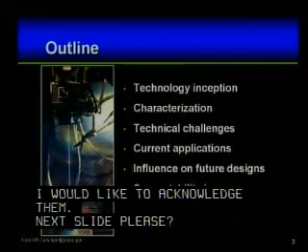Next slide, please. This is an outline for my talk today. I'll start off with the inception of the technology, and then talk a bit about characterization of the materials that are produced using the EBF3 process. I'll then proceed on to some of the technical challenges that we've come across with the process, and specifically looking at what needs to be solved in order to reach full commercialization. And then I'll switch gears a little bit and talk about applications, both current applications and some potential future applications that we're working on, both for aeronautics and for space vehicles. And then I'll end up with a little bit of the possibilities that this technology may offer for in-space support.

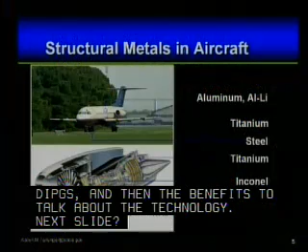Next slide, please. So starting off with the motivation, a little bit of the process description of the EBF³ process, and then the benefits to talk about the technology inception. Next slide. Okay, so in structural metals used in aircraft today, typically you see aluminum or aluminum lithium used in fuselage and in wing panels. The highly loaded areas of the aircraft, like wing tips or wing roots, and some of the hot structures in the engine use the titanium alloys. High-strength steels are used for landing gear, and Inconel can be used in the hottest sections of the engine. So there's a large amount of metals that go into today's aircraft. And even with the future aircraft moving towards composite structures, there's still a significant metallic component in aircraft structures.

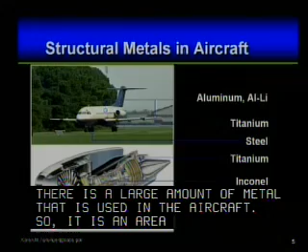And so it's an area that we wanted to look very closely at to see what is new on the horizon. We've been building airplanes out of metals for a long time. What's new on the horizon? Next slide, please. So our motivation, we were challenged back around 2001 to come up with what is new in metals. And specifically looking at efficient lightweight structures, it has to be a cost-effective process, and potential for enabling new alloys that are beyond the current conventional suite of materials that we use were three of the areas that we wanted to look at.

And what we ended up with, we didn't set out to develop a disruptive technology, but we ended up with a disruptive technology. And by disruptive, I mean that this is a technology that has the possibility of replacing a segment of the manufacturing market as it currently exists today.

Next slide. So back in 2001, when we first started looking at what's new in metals processing, layer-additive or deposition processes had been around for several years, but they were primarily using lasers, either a CO2 or a neodymium YAG laser. And the problem with lasers trying to do metals fabrication is that lasers are reflected off of shiny surfaces, and metals are inherently shiny.

In addition to the coupling efficiency between the laser and the metal to be able to melt, there are also issues with the energy efficiency. Only 5 to 10% of the energy, and this has improved over time, but in 2001, only 5 to 10% of the energy that was actually pulled from the wall ended up being used to create the beam. The rest was all waste heat.

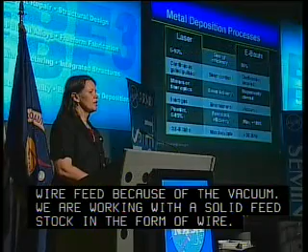And we work with a wire feed because of the vacuum. We're working with a solid feedstock in the form of wire, but 100% of that wire is captured into the part that you're building. And we've demonstrated deposition rates on the order of 30 pounds per hour. So we believe that the electron beam process has commercialization potential, and it solved many of the problems that existed with the state-of-the-art in 2001.

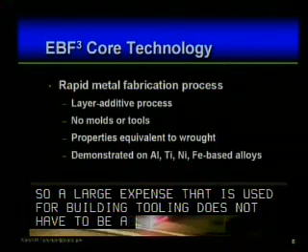Next slide, please. So the core technology for EBF³ is that it's a rapid metal fabrication process. It's layer additive. It does not require molds or tooling, and so a large expense that's used for building tooling for forgings does not have to be absorbed when you're using an EBF³ process. The properties that we've observed are equivalent to wrought properties, and I've got some charts later on to show you about that. And we've so far demonstrated this on aluminum, titanium, nickel, and iron-based alloys, which are all of the alloys of interest that I showed on the earlier slide for aircraft structures.

Next slide, please. So the EBF³ process, we start with a CAD drawing for the part that you want to build. That part is sliced, the CAD drawing is sliced and fed into the EBF³ equipment. The E-beam is then turned on to create a molten pool, and wire is fed into the molten pool, and then the part is translated on a layer-by-layer basis to build the parts up. We've been teased about building a replicator in the vernacular of Star Trek. Next slide, please.

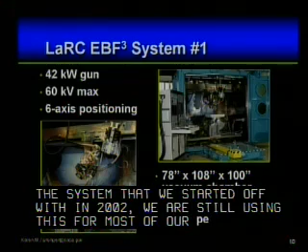The system that we started off with in 2002, we're still using this for most of our process development for our large fabrication experiments. And this system is an electron beam welder that we purchased, and we had it modified, adding a double wire feed so that we could build the layers up. It's got a high power electron beam gun. We're only using about a third of the power that is available to us, but because it was a commercial off-the-shelf system, we bought something that could suit what we needed. The vacuum chamber is a 7 by 9 by 9 foot steel chamber, and the build envelope is on the order of 2 by 4 by 5 feet inside of that vacuum chamber.

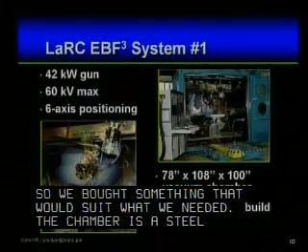Next slide, please. Several years after that, we started looking at trying to build a smaller system. The process is exactly the same, so the physics of the process is still using the electron beam to build up a part.

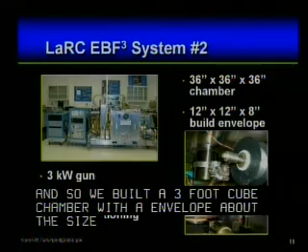But we've scaled everything back so that we could do some demonstrations for 0G. And so we built a 3-foot cube chamber with a build envelope about the size of a shoebox. And we've got a 3 kilowatt gun for safety on the aircraft and just to scale everything back. It's enough power for what we need to do.

Next slide, please. So this is, let me set up for you, next I'm going to have a video, but let me set that up for you. This is a picture looking in the chamber of our large electron beam freeform fabrication system back at Langley. If you roll the video, please. This is looking through the door, just showing some of the motions capable in the system itself.

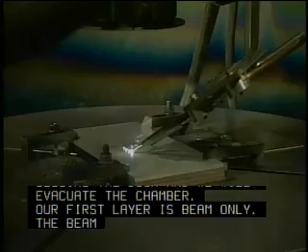Here we're closing the door, and then we'll evacuate the chamber down to about 10 to the minus 5 torr. Now our first layer is beam only, so the beam is coming down from the top center of the screen. And the first layer is just to clean off the oxides on the surface and to give us a nice warm surface to be able to adhere the deposit to. Now we're showing the subsequent layers being added on. This is all 2219 aluminum, and this is real time.

We can build faster than this, but we're using 0.063-inch diameter wire, and the only part of this that is molten is the shiny part of the molten pool in the image there. So the process solidifies rapidly. So some of the reasons, I've already talked a little bit about the EBF³ process, but the main idea is

that we can build near-net shaped parts, so you can minimize scrap, reduce the part count. It also offers efficiency in design, lighter weight designs, and enhanced performance. The unitized components, unitized I mean being able to build things in a single piece. So instead of building an assembly that needs to be riveted or bolted together, you can build components of some complexity into a single part. And that offers the opportunity to, because this is a layer-additive process, integrate different functions into the structure, or we can change the material on the fly so that you've got different alloys at different points. If you have reason to need different alloys with different properties, we can tailor the properties locally.

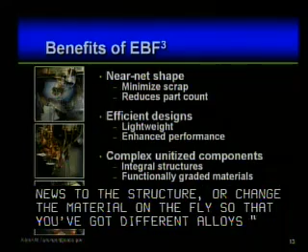And finally, it's got some green manufacturing ramifications. Again, this was something that we hadn't set out to do, but it ends up being a nice benefit in that we're minimizing the waste products and it's energy and feedstock efficient. Next slide, please. To give you an idea as to what I mean by energy efficiency.

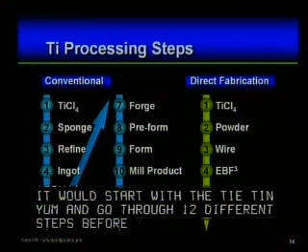Starting from titanium ore, these are all of the process steps that would be required to go from titanium ore to a final product. On the left, in blue, is the conventional processing that we would use today. So you start with the titanium ore and go through about 12 different steps before you get to the final part. There are losses in energy and in titanium itself along each one of these steps in the process, because you have to forge a billet and then you skim cut it and you press it down, skim cut it, roll it, skim cut it again. So you've got a lot of losses in the process of just going from titanium ore to a billet and then machining it out to a final product.

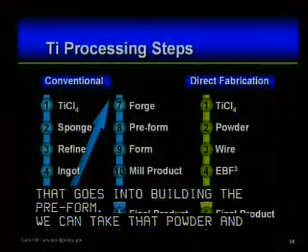DARPA has been working on a new process and has funded several organizations to look at low-cost titanium. And the low-cost titanium process basically skips steps 1 through 9 to go directly to a powder form. And so you've dropped out a lot of the work that goes into building the preform. And then what we're doing is, we can take that powder, go directly into a wire form, and then that wire becomes the feedstock for E-beam freeform fabrication. So in using this future set of processing steps, you can eliminate about half of the steps and a lot of the losses in both energy and in titanium.

Next slide, please. This shows you in a little bit more detail the kinds of savings that we're talking about. And this is the reason that industry is so excited and is really investing heavily now in trying to get this technology commercialized. Along the top line is conventional machining, and these are real numbers. This is really the way it is done today to build structures for aircraft parts. It'll start with a 3,000-pound billet of material. Machine it down to a 150-pound part. Obviously you're losing a lot of the titanium. There's a lot of energy that goes into making all of the chips.

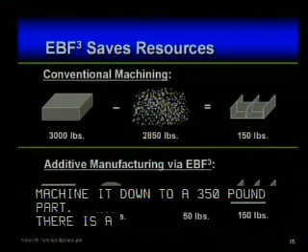And furthermore, there's all the cutting fluids that are required to keep the part cool during all of that machining operation. And those cutting fluids have to be handled as hazardous waste at the conclusion of the process. So instead, what we're proposing is you would start with a rolled sheet or plate that would become part of the final part, and then use the wire feedstock with the EBF³ process to put the material where you need it.

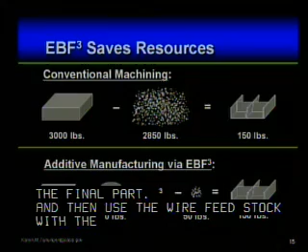There's a little bit of final machining, but it's just taking it to your final tolerances. And you end up with the exact same part at the end of the day with a lot less titanium lost and less cutting fluid to have to try to dispose of afterwards.

Next slide, please. Now I'm going to change gears, talk a little bit about the characterization of some of the materials that we have produced using the EBF³ process, specifically looking at the microstructure, mechanical properties, and some of the structural integrity. And I'll try to go easy on those of you that don't have a material science background out there.

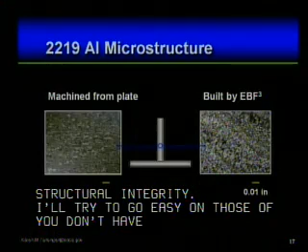Next slide, please. On the left, the picture that you see, this is what a typical plate microstructure would look like. And so today, the aircraft that are flying would have the kind of microstructure that's shown on the left. And it's kind of an equiaxed grain structure, so everything is kind of circular in shape. And if it's rolled plate, sometimes you'll see some of those grains that really stretch out.

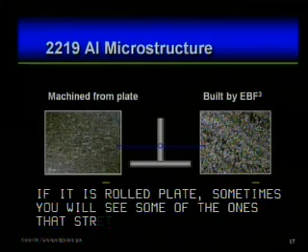In comparison, on the right is the type of microstructure we're seeing with the EBF³ process. This is more what you might see in a casting. You see the fine grains and the large. There's a variation in the grain size, but it's still a relatively small grain structure.

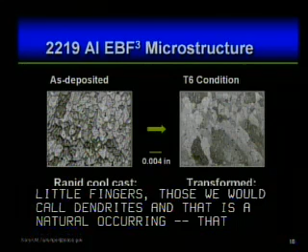Next slide, please. Now, taking the picture that was on the previous chart on the right and looking at it at higher magnification, that's now shown on the left. And what you see is things that look kind of like a fern structure, little fingers. Those we would call dendrites, and that naturally occurs in castings, on cooling. When you take a molten metal and cool it down, that naturally occurs. But we have relatively small grains in the as-fabricated microstructure.

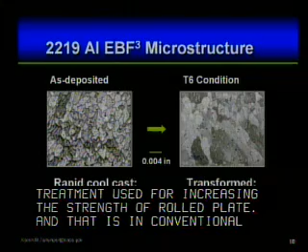Now, if we go through a T6 heat treatment, this would be a standard heat treatment that would be used for increasing the strength of rolled plate in conventional materials, we end up transforming the grain structure, so the grain boundaries are retained, but we've erased, if you will, that finger microstructure. So our microstructure doesn't end up looking too much differently from a forged type microstructure. It's a little bit different, but not too much different.

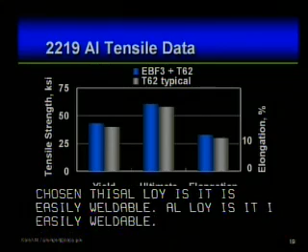Next slide, please. So what does that mean for the mechanical properties of this material? 2219, part of the reason that we've chosen this alloy is it's an aluminum 6% copper alloy. It's very easily weldable, and it's readily available. It's used in the space station. It's not used as much in aircraft structures today. There are higher strength alloys that are used today. But we have also done deposition with other real conventional aircraft alloys. So the 2219 is the alloy that I'm showing you, but we have done extensive testing on a variety of other alloys as well.

What this chart shows you, on the vertical axis on the left is the tensile strength, so the first two sets of bars, the yield strength and the ultimate strength, map to the left, and then on the right is the elongation, so that third set of bars is the elongation. And the blue bars are the EBF³ plus the T6 heat treatment, as I showed you in the microstructure on the previous chart. And then the gray bars are handbook typical values for the same heat treatment. And what you see is that the properties are really quite comparable.

I don't have error bars shown on the chart here, but the error bars are within 1 or 2 KSI. So it's a fairly tight data range that we have in the EBF³ parts that have been fabricated. So this gives us some confidence that although the microstructure may look a little bit different, mechanical properties are still performing as you would expect in a conventional material. We're still doing a little bit of work to understand what that microstructural difference may mean in other mechanical properties like fatigue and fracture toughness, but we've got some confidence that this will work.

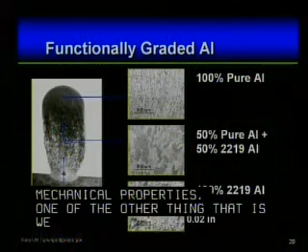Next slide, please. One of the other things that we have looked at is functionally graded aluminum. And here the base plate is 2219, again, that aluminum, 6% copper, and we've graded it up to 100% pure aluminum at the top.

So what you're looking at in the picture on the left is a cross-section of a 10-layer build. The first layer was 100% 2219, and then each layer was a 10% change in the chemistry, building it up to 100% of the pure aluminum. What we see here is that the microstructure at the bottom of the 100% 2219 is about what we have seen in the other EBF³ deposited 2219.

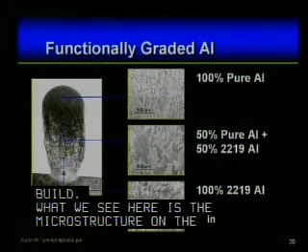100% pure aluminum doesn't have alloying additions, and so it doesn't have a lot of features. Again, that's what you would expect. And grading up through the middle, what you do see is that we have a continuous gradation, even though this was deposited in a stepwise fashion.

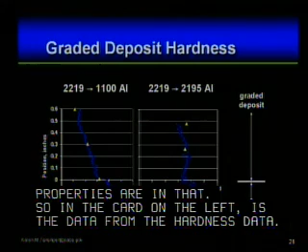Next slide, please. Looking now at the hardness, it's hard to do a tensile property when your material is changing continuously, but looking at the hardness will give us a feel for what the properties are. On the chart on the left is the hardness data, a hardness trace going up the center of the microstructure on the previous chart. The zero axis is the plane of the base plate. So everything below the axis is in the base plate itself, the forged material, and everything above that line is in the deposit.

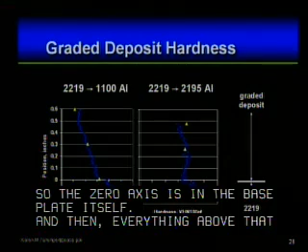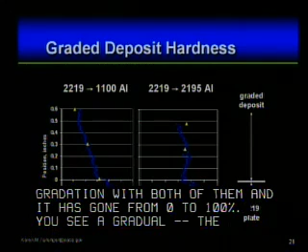I've got two graphs here. The one on the left is 2219 to pure aluminum, or 1100 aluminum. The one on the right is 2219 to 2195, which is an aluminum lithium alloy. This shows that we've done gradation with both of them, going from 0 to 100%. What you see in the data is a nice gradual shift from the hardness in the 2219 to the hardness in the pure aluminum, which is softer by nature.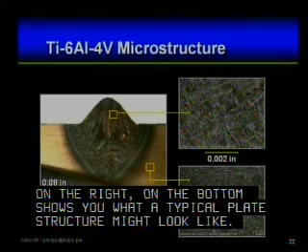Next slide, please. Shifting gears a little bit, looking at the Ti-6-4. Again, this is one of the alloys that's very heavily used in both commercial and military aircraft. This picture shows on the left a cross-section of a single bead deposit. The picture on the right at the bottom shows what your typical plate microstructure would look like, and you see a similar microstructure to what we saw in the aluminum. The white dots are the alpha phase, and the center parts are the beta phase in the lower microstructure.

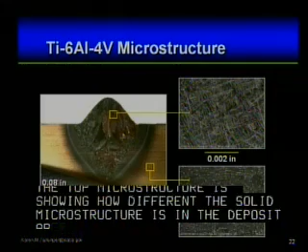The top microstructure shows how different the solidified microstructure is in the Ti-6-4 deposit area. You see what we would call a Widmanstätten alpha-beta lath structure. But again, heat treatment will bring that structure down to something that looks similar to what we have down below. Next slide, please. Looking at the Ti-6-4 tensile data, just like we saw with the 2219, the properties are quite comparable between the as deposited and the annealed wrought product.

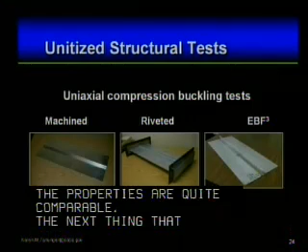Next slide, please. The next thing we wanted to do, if we're going to incorporate this into structures, was understand what the structural performance might be. So we built three sets of panels, all with the same final geometry. These panels are on the order of 24 inches long and 8 inches wide, with a single blade stiffener down the middle that's about 3/4 of an inch high. For the machined panel, we started with 1 inch thick plate and machined it down, leaving the blade stiffener integral to the base plate. For the riveted panel, we started with 1/4 inch thick base plate and riveted on an L bracket to give us the blade stiffener.

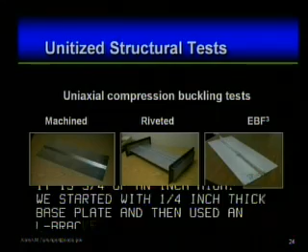And then we electron beam freeform fabrication deposited a stiffener on the third one and machined it so that all three had similar stiffener thicknesses. Next slide, please. And this is the compression buckling test, tested in uniaxial compression. What we noticed is that the machined panels performed the best. On the chart, you see load on the vertical axis versus displacement. The machined panels performed about 5% better than the EBF3 panels. The riveted panels are a little bit stiffer because of that extra material, but the riveted and the EBF3 panels gave us comparable max load capacity.

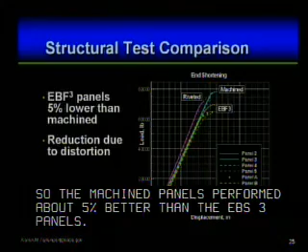One of the things we've noticed in the EBF3, and I'll talk about it a bit later, is that we do have some distortion that occurs because of the focused heat source.

And the distortion in going back and doing finite element analysis to compare to the mechanical, the physical compression data, we were able to explain that the reduction from the machined to the EBF3 is because of the shape change in the panel that occurred due to the distortion during the EBF3 process. So if we can get a handle on the distortion, we believe that we can increase the structural capacity of that EBF3 panel. Next slide, please.

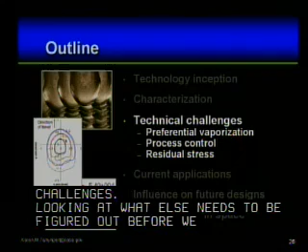Now to talk a little bit about technical challenges, and specifically looking at what else needs to be figured out before we can take this to commercialization. I'll talk briefly about preferential vaporization, process control, and residual stress. Next slide, please.

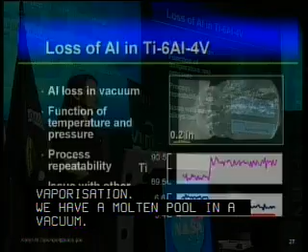Next slide. Thank you. So the first one, preferential vaporization: we've got a molten pool in a vacuum. And so if you've got Ti-6-4, you've got titanium, aluminum, and vanadium sitting in that melt pool. Because you don't have an atmosphere to suppress vaporization, we tend to have a little bit of metal vapor that comes out of the molten pool. We lose aluminum at a faster rate than we lose the vanadium or the titanium because the aluminum has a lower melting temperature than the titanium or the vanadium.

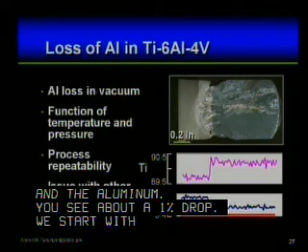So the picture on the right is the same types of microstructures that I've been showing in the past, only it's now laying on its side. So the base plate is on the far left of that microstructure, and then you see the deposit off to the right. And then the two lines below it, you see a titanium trace and an aluminum trace. This is just looking at the chemistry along the center line of that deposit. The titanium didn't change, but the aluminum, you see about a 1% drop. So we start with 6.5% aluminum in the wire and the base plate. As soon as you get melting, you see that step function drop in the aluminum content because we've melted in a vacuum.

It's a function of temperature and pressure, but it's an issue for process repeatability. So this is one area that we're looking closely at: how do you mitigate this, or how do you at least understand it and make sure that it's repeatable, so that when we are trying to use this technology in a production environment, we're able to get the same part every single time you build it. And the real challenge is, you see the red line at the bottom of the aluminum trace. If you dip below that red line, you are no longer within the Ti-6-4 chemistry bound. And that means your properties are going to drop off, and you're not going to be able to certify the process. Next slide, please.

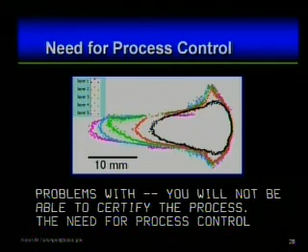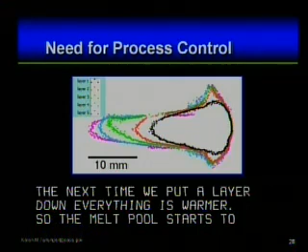The need for process control is shown in this chart. The chart in the middle shows the shape of the melt pool. The black line, the smallest melt pool, is the shape of the melt pool on the first layer of the deposit. And then each line out is layers 2, 3, 4, and 5. So what we see is the melt pool changes with temperature. Your first layer is going down onto a cold plate, and it freezes out fairly quickly. It's got a nice tight melt pool. The next time we put a layer down, everything's a little bit warmer, and so the melt pool starts to stretch out. If you don't make any changes to your process, or if you're not watching the process, you don't have the same size, shape, or temperature in the melt pool, and that's going to have ramifications for the chemistry and the distortion, residual stress, and everything else that we see.

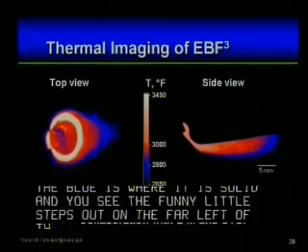Next slide, please. So we've put thermal imaging cameras into our system. The picture on the left is the top view looking straight down. You can see the white line is the trace of our beam itself. The orange is where the metal is molten, and the blue is where it's solid. And you see the funny little step out on the far left of that image. That's where the wire is entering the melt pool. The picture on the side is giving us a side view. So again, the wire is on the left, and you can see where that wire is being melted in the beam, and then the melt pool traces out from there. And we understand that we need to look at both the height, so that we build the part that we have programmed to build, and the top view, so that we can control the temperature. Next slide, please.

Localized heat, we understand, and this is nothing new. This has been very commonly known for decades in the welding industry. But localized heat induces distortion and residual stress. You tend to get very high compressive residual stresses right at the root of the deposit, or of the part where you're trying to weld it on. And it just is trying to pull that deposit off of the base plate.

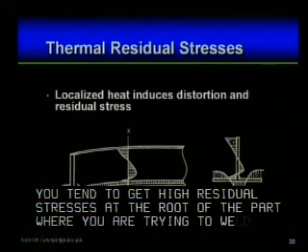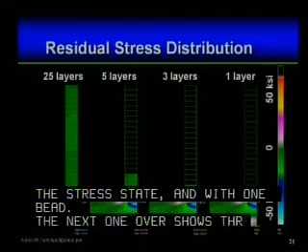Next slide. So this is a series of finite element modeling experiments that we've run, and we've been comparing finite element to the experiment to try to help guide what experiments to run and how we mitigate the residual stresses and the distortion that's developing in the material. Across the bottom you see the base plate, and what you see on the far right is the stress state with one bead. The next one over shows 3-layer height. So we're looking at how the stress state changes as the layers are built up. The blues are high compressive residual stresses, and then the pinks are the tensile residual stresses, counterbalancing that.

But what we do see is that after about 3 to 5 layers, the stress state really doesn't change. And so we know that if we're going to build an integrated structure where the deposit is part of the base plate and it's going to stay that way, if we want to avoid or minimize the distortion and residual stress, we need to do it in the first couple of layers of build. Next slide, please.

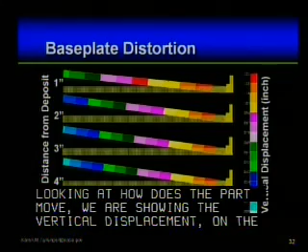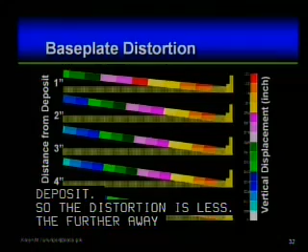Looking then at how the part moves when those residual stresses are relaxed, when you unclamp it. What we're showing here is the vertical displacement. The deposit is on the far right of the slide. And what we see is that the base plate doesn't actually curve. It bends right in that area of high stresses, right underneath the deposit. The experiment that we were running here had a series of different clamping distances away from that deposit. And what you see is that the distortion is less when you clamp and constrain it closer to the deposit. The further the clamping gets away from the deposit, the more the base plate is allowed to move a little bit while the process is cooling down.

Next slide, please. We've been working very closely with Boeing, Lockheed, Spirit Aerosystems, and the Air Force, and we've recently formed an alliance with these companies. It's a joint funded alliance, but what we're trying to do is develop some process standards and to catalyze growth of a supply web and to address all of the technical challenges that I've just described. NASA has been asked to lead this because of our leadership and the fact that we've been on the forefront of this technology development for so long, and also because we offer the potential for providing public benefit without private preference. What I mean by that is that we'll develop this for the good of the nation, not for the good of one single company.

But this group has just started working together, and we've been exchanging ideas. But the real idea is we want to try to pull together the buying power. Boeing, Lockheed, and Spirit each had activities on their own, and so now in working together we can get a much richer database in a faster time frame. The other thing that allows us to do is catalyze growth of a supply web. Right now there are no companies out there that use the EBF³ process for profit. So if Lockheed or somebody decided that they wanted to buy a part built with EBF³, there are not places that they could go to buy parts currently in the marketplace. And so there's a growth that needs to happen, and having all of us working together, we can show that there's a much larger volume of need as compared to any one of us trying to go out and convince a company that this is a good technology to invest in.

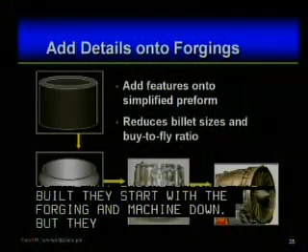So what they would like to do is start instead with a 1/2-inch thick forging and then add bits of material on to build up the bosses and flanges that they need for the final part. It reduces the buy to fly ratio and the billet sizes and all the good things that we talked about earlier. But adding details onto forgings is really the first place that this is going to see real commercial benefit because of the cost and the reduction in the amount of material that you need.

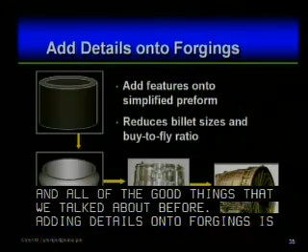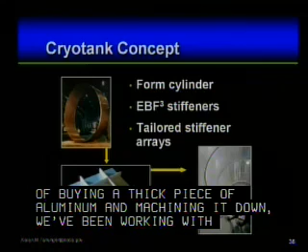Next slide, please. A concept for cryo tanks that we've been working on is, instead of buying a big thick piece of, there's a theme here, you can tell. Instead of buying a big thick piece of aluminum and machining it down to leave an orthogrid stiffened structure inside, we've been working with companies that can build a very large, the picture on the top is a 14-foot diameter cylinder. It's a single piece.

But they can't put stiffeners on the inside of that because of the shear forming process that's used to build it. And so what we're proposing is, is there a way that we could get inside after it's been shear formed and be able to build those stiffeners in place? And this is where some of our crossover into our portable system starts coming in, because you've got to be able to get onto the inside of this cylinder. Our portable system could be put onto a robotic arm and moved around on the inside of that cylinder to build the stiffeners that you need.

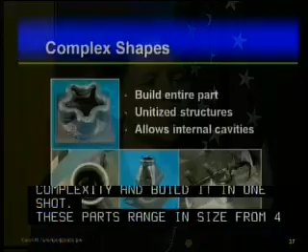Next slide, please. The other idea is to be able to build more complex shapes. So instead of designing something that's an assembly, we design components that have some complexity and build it in one shot. And so this just shows a couple of different parts that we've built to date out of aluminum and titanium. And these parts range in size from 4 inches high to about 22 inches in height. So there's a variety of different things. But this allows you to get some complexity like internal hollow cavities that can't be machined unless you build it in multiple parts and assemble it or weld it together.

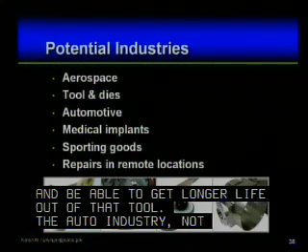Next slide. Some of the industries that we have talked to that have expressed interest: aerospace industry, obviously. The tool and die industry, for building the dies and the tooling themselves, because of the functional gradient, you can hard face a tool, a casting tool, and be able to get longer life out of that casting tool. The automotive industry, not for full production automobiles, but for aftermarket parts, or perhaps for the racing circuit and things like that. There's a high demand for customized parts, and so talking about the customized automotive industry. Medical implants, so that a hip joint can be designed directly for the patient instead of saying, okay, you look like a medium or a small. Be able to build a hip joint that fits the socket that it's going into.

Sporting goods, and I think that's the first place we'll probably see Tiger Woods out there with the EBF³ golf club. And finally, repairs in remote locations. If we can build a small system, and this harkens back to some of the work that we've got in the interest in space, is the ability to give the autonomy of being able to build whatever you need when you need it on demand. And there are some locations on Earth that may have that requirement as well.

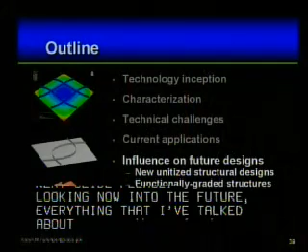Next slide, please. So looking now into the future, everything that I've talked about so far is just replacing the way we build things today. If we can get into the designers' heads, how would things look in the future? So looking at some new unitized structures designs, functional graded structures, and some integrated systems.

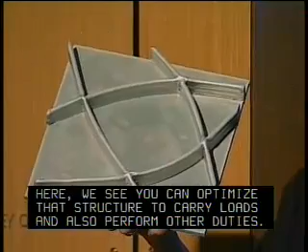Next slide, please. So the idea on novel structural design, we want to be able to go from a straight stiffened design. So right now, an orthogrid panel would have straight stiffeners in an orthogonal array. And it's partially built that way because this has been designed to be assembled. And so instead of designing something with a straight grid structure like I'm showing here, we think you can optimize that structure to not only carry loads, but also perform other duties, and allow the stiffeners to curve. Because we're putting the metal only where you need it, you can build something like this with the EBF³ process. This is not easily built with other processes to date.

And so the curvilinear stiffeners have potential benefits in damage tolerance, in acoustics, in reducing the weight further, and in enhancing other performance metrics. And so this is what we want aircraft structures to go to in the future. Next slide.

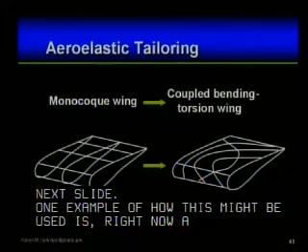One example of how this might be used is aeroelastic tailoring. Right now, a monocoque wing is built with ribs and stiffeners and spars that are all on an orthogonal array, and they're all riveted together. The new airplanes coming out, the structure looks exactly like that. It's just glued together with composite.

But the problem is that's designed to carry the aerodynamic loads, but the bending and the torsion that occurs in an aeroelastic event, things like wing flutter, are not taken into account. And so the thought is, can you build something that couples the bending and the torsion so that the wing naturally deflects when it's hit with a loading? By putting in curvilinear stiffeners, we believe we can change the structural design so that you can naturally get that kind of motion into a wing in a completely passive structure.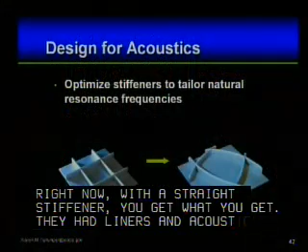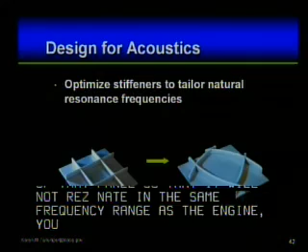Next slide, please. Designing for acoustics. Right now, again, with a straight stiffener, you get what you get acoustically, and they add acoustic liners and acoustic dampening material to try to shield the passengers inside the aircraft from the drone of the engines. If instead you could curve the stiffeners and tune the frequency of that panel so that it will naturally not resonate in the same frequency range as the engine is producing acoustic noise, you can not only reduce the acoustics going into the cabin, but you can also reduce the fatigue loading going into that structure because of the vibrations that are being built in.

So just some possibilities, things that we're trying to work towards, and things that we think this type of technology may be able to apply to. Next slide, please.

Functional gradients. Right now, I showed you some pictures earlier. Right now, this is a gee whiz, this is something that we can do. We can do a gradient in the plane of the deposit, which is shown in the top picture there. So it changes from 100% of alloy 1 to 100% of alloy 2 as you're laying down the deposit, and it's purely done with a double wire feed, changing the feed rates of the two wires that are being fed into the molten pool.

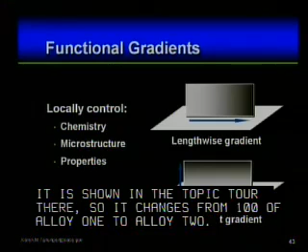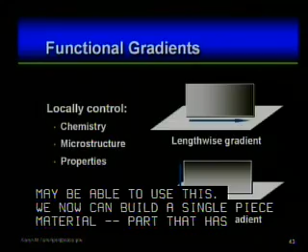Or we could do a build height gradient, which is the picture that I showed you earlier in the talk. This allows us to control locally the chemistry, the microstructure, the properties. We've got to think a little bit more about how we may be able to use this, but I think that there is real potential. And so I'm laying it out there: we now can build a single piece part that's got different materials with different properties at different locations in the part. How can we take advantage of that to really drive the performance of our structures?

So instead of using an adhesively bonded stiffener, can we find a way, and we've been working a little bit on this, to selectively reinforce? So we incorporate those ceramic fibers into the part as we're depositing it.

The other potential is the vehicle health monitoring world, where we want to be able to monitor what the vehicle is doing, both temperature and strains and stresses and cracks and everything else. And so the ability to embed sensors into the body of a single-piece metal structure, we think there are ways you can use this technology to do something like that. So, it may open new design space.

Next slide, please. Okay, last section of the talk. Trying to look now, instead of all of the aeronautics world, at space, supportability in space. I'm going to talk a little bit about why we might want to do something like this in space, and then show you the results of some zero-G flight testing that we've done. I've got some fun video to show you of that, and talk just briefly about some possible applications where the technology may offer some benefits.

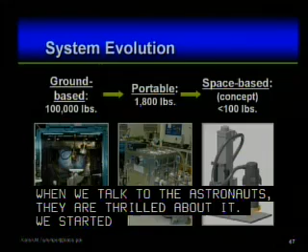So next slide, please. So we started, obviously, with a 100,000-pound system with a vacuum chamber of 7 by 9 by 9 feet, which is not going anywhere. The portable system that I've showed you pictures of, that's about 1,800 pounds. Again, it's way too big, way too heavy to go to the moon. But it was built as a demonstration so that we could do the zero-G flight testing.

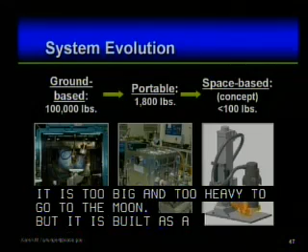Now, if you're going to the moon, the reason that we have the big vacuum chamber is because we need to keep the atmosphere out. When we're going to the moon, the atmosphere is already what we need, so let's take advantage of that. You can reduce the weight significantly. You can drop the weight by half just by eliminating the vacuum chamber and support structure associated with the vacuum chamber and the pumping. And so if you can go to something that works outside of the spacecraft, now you've got the potential to just bring a small positioning system like a little robotic arm, an electron beam gun, and some wire, and you're good. And so we think that we've got some concepts on the board, and we think that less than 100 pounds is a doable system. Next slide, please.

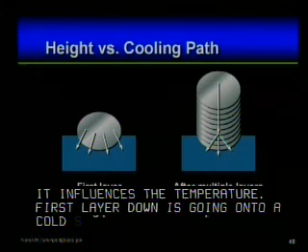Now, one of the things that we had to understand, and we were told, well, if you take this in 0G, you're just going to build ball bearings. And so we wanted to look closely at how the process is going to change as we reduce the gravity. First thing we wanted to look at is the cooling path, because we know that the cooling path influences the temperature. First layer, just like in the residual stresses, first layer down is going onto a cold substrate, and so there's plenty of thermal mass to cool that bead down. As you build up in layers, not only do you have a lot of retained heat because you're building onto something hot, but you've also reduced the cooling path down through the part that you've built.

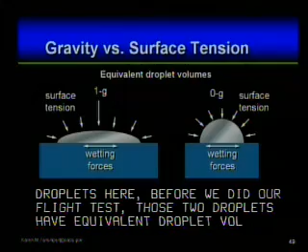And the reason that this is an issue, next slide please, is because surface tension is a function of temperature. And our question was, the two droplets here, before we did our 0G flight test, this is a little bit exaggerated, but those two droplets have equivalent droplet volume. And so the question was, is the gravity working with the wetting forces to spread out that molten pool, or is the surface tension really driving the process, and so that's pulling that bead up into a tight bead?

Next slide, please. So we've done a series of 5 weeks of flight testing down at NASA JSC on their C9 reduced gravity flight. And for those of you that aren't familiar with that aircraft, they get on the order of 15 to 20 seconds of 0G. You can get a little bit longer if they're flying a lunar or a Martian parabola, followed by a 1.8 G pullout. And they do about 40 cycles per flight. And so what we did was we only deposited during the reduced gravity portions of the flight. Since everything solidifies as soon as we turn off the beam, we were fairly certain that we weren't changing anything during the pullouts. Next slide, please.

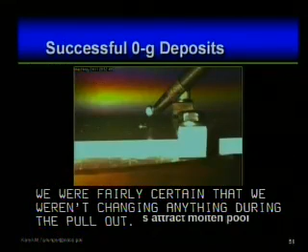Okay, so next I've got a series of videos that just shows you some of our results. And before we run those videos, I just want to set up what you're going to be seeing. The beam is coming down, as in the previous set of charts. The beam will be coming down from the top, and what you see there is the wire feed nozzle. Right now it's got a little ball of aluminum that came from a previous deposit sitting on the end of it. And in this case, we're just moving the base plate, and we're looking through a little camera through the port. So run video, please.

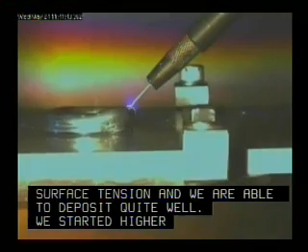The first pass is just that preheating pass. When the wire starts coming out, it shoots that bead off, and you see the wire goes down, the wetting forces overcome the surface tension, and we're able to deposit quite well. We started a little higher than we should have, which caused that bead to form at the beginning. This is that same circle about 8 layers up, and you can see it looks just like on Earth.

We did have the opportunity to learn from the 0G flights. We had a couple of situations, shown in these next two video clips, where we had the height off. As long as you're feeding the wire and it's melting close enough to the molten pool, close enough to the surface, everything adheres. But you'll see in the last video coming up that if you get your height off, things go bad in a hurry. When we start separating from the molten pool, it just builds a bigger and bigger blob until we get close enough. What's encouraging is that the wetting forces do overcome the surface tension, so the process does work.

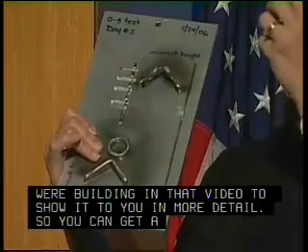The other thing we've learned is that height is absolutely critical, especially in a reduced gravity environment. I have here the part that we were building in that video to show you in a little more detail so you can get a feel for the size of those features. In 0G, those blobs continue to build up on the end of the nozzle, so the blobs are much bigger than you would get in a 1G drip.

So this is the part that went down, and it looks pretty good, but you can see how much of a surface change we had there when the drips started getting away from us.

So where could we use this? We think this could be a concept for supporting long-duration human exploration missions, either on the moon or on Mars.

We've also looked at the possibility of using this for on-orbit assembly or repair, being able to build extremely large structures in space. We worked with DARPA a little bit. DARPA actually funded us to do our very first set of zero-G flights because they were interested in building a 100-meter space telescope in geosynchronous orbit. One of the things they wanted to demonstrate was that you could manufacture it in orbit, that you didn't just send it up and try to do the assembly - there was actually a manufacturing process, a component to that.

So it's possible that you could use this in conjunction with pre-manufactured parts for doing some on-orbit assembly or repair.

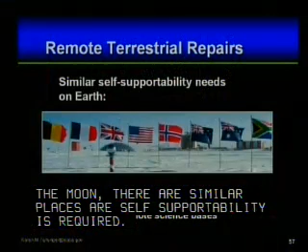The other thing is that just like the need for autonomy on the moon, there are similar places where self-supportability is required on Earth. Down at the South Pole, they are without resupply for 6 months out of the year because of the ice floes. The Army has interest in reducing their supply chain, and they've actually deployed a machining center, bringing bar stock and machining components in Kuwait and Baghdad to fix Humvees and things like that as they go. Navy ships and submarines also have interest and need for the autonomy and on-demand repair and fabrication that the EBF3 process may offer.

So in summary, the EBF3 technology has really been led by NASA Langley since its inception around the 2002 timeframe. It does have some elements of being a disruptive technology. As we've talked to industry, they've been very excited - they say we want to replace our forging with plate that we build up the stiffeners on because we see the possibility here, the real potential in saving weight and building parts much faster. Right now, to get those 3,000-pound forgings, they're waiting 18 months. So if you can build something in 6 weeks, you've saved them an awful lot of time and money. It cross-cuts from aeronautics into space, both areas NASA is interested in, but it also has cross-cutting ramifications into the manufacturing sector at large.

I think that to me, the thing that's most exciting is what's spinning off is some of the new structural designs. It may be that EBF3 is not the way some of these new structural designs end up coming into play 20 or 50 years from now. But EBF3 has given the designers the vision of something that may be possible. So I think it's kind of cool for me to see that it's expanding, and the influence there.

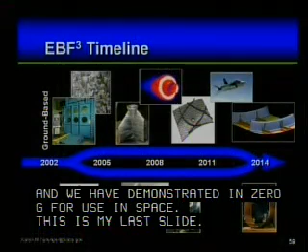And we've demonstrated in zero-G for use in space. Next slide, please. This is my last slide, and it just shows you the timeline from inception. First system delivered, the ground-based system, in 2002. And it just shows you we've come a long way in a relatively short period of time. We are hoping that we see the first EBF3 parts certified and flying on aircraft in the 2011 timeframe, and we're excited about the potential for being used in structures for a long time to come.

So I thank you all for your attention, and we've got some time for questions.